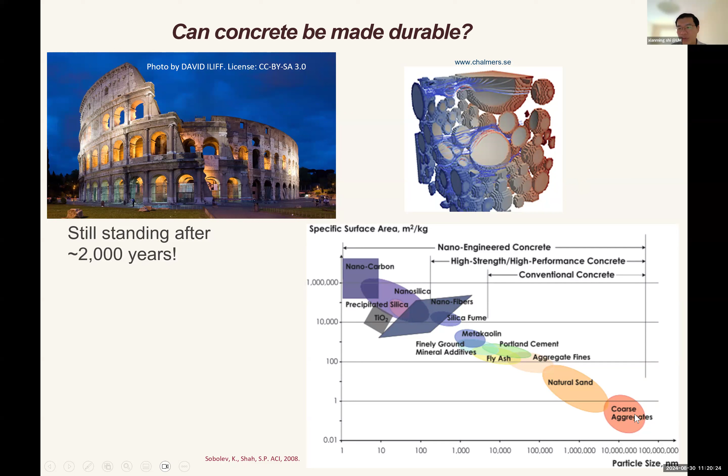One interesting thing is that in the last 3 or 4 decades especially, there's emerging technology such as nanotechnology. If we put concrete as a composite material under that sort of lens, we're talking about — if you look at this chart, on the x-axis is the particle size, the y-axis is the specific surface area. You can see that coarse aggregates are way over there towards the right and at the bottom, meaning it has high particle size but low specific surface area.

But if we look at the other end of the spectrum, say nanocarbon, for instance — today I'll talk quite a bit about graphene oxide, which is one type of nanocarbon — then we're talking about a size of between 1 to 5 nanometers, and a surface area of 1 million square meters per kilogram, which is really high. So with that kind of high specific area, the property or behavior of the material changes significantly.

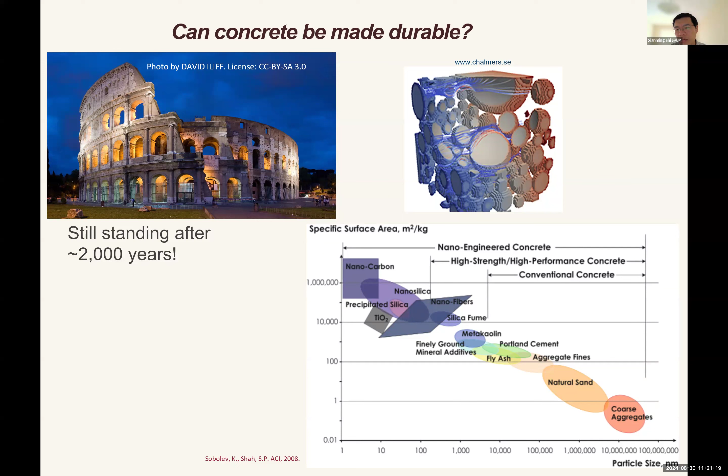So that's where the magic occurs, because this type of material tends to have really high surface activity, and therefore the interaction between the nanocarbon with cement particles and water will be dramatically different than how a coarse aggregate would interact with cement and water.

So today I'll try my best to share some of the recent studies, starting from a graphene oxide enabled fly ash based geopolymer, which is a patented technology we developed at Washington State University. Then, of course, I move on to some other graphene oxide enabled innovations. Just to give you two examples: one is how we can better use silica fume, yet another industrial byproduct — in this case, silica fume from the semiconductor industry, and fly ash from burning coal to produce electricity.

And then also another case was how we could upcycle waste masks, diverting them from the waste stream towards beneficial use in concrete. I'll also talk about some other nanotechnology-enabled innovations which may not be exactly graphene oxide — for instance, nanosilica, nanoclay, and things of that nature — and then conclude. This is a little photo we took in my previous lab where we were doing some work on carbon negative concrete.

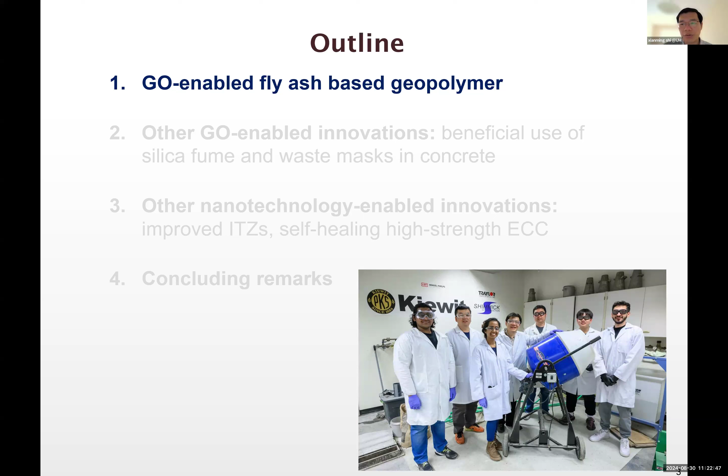Nanotechnology was also a key component to that technology, which is now patent pending, and we even launched a startup company, and the company already got some SBIR grants.

Starting with the first topic, graphene oxide enables clinker-free concrete based on coal fly ash. We made some pervious concrete cylinders in the lab. The two on the left were made with ordinary Portland cement, and the two on the right were made with coal ash without any cement clinker. The color is slightly different, but other than that, most behaviors are pretty much comparable in terms of mechanical properties and durability, as you will see later.

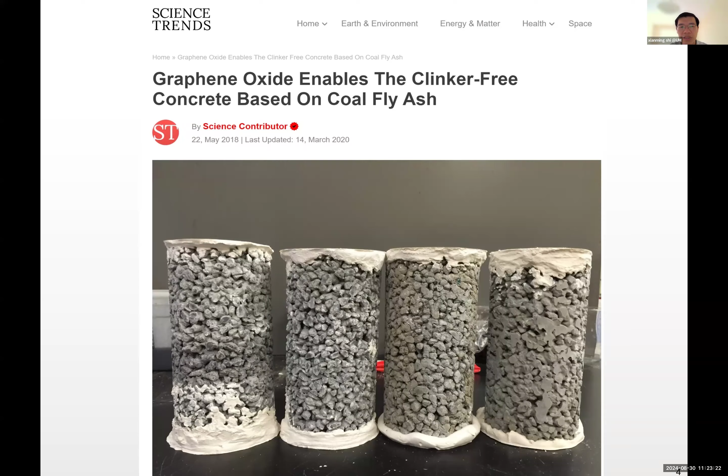Taking one step back, why do we do this? On the left-hand side, you can see that cement production is arguably responsible for, some say 5%, some say 8% of global CO2 emissions. But anyway, it's a large footprint.

On the right-hand side, you've got this underutilized industrial byproduct. From burning coal to produce electricity, we have a lot of ash, fly ash or bottom ash. You see this picture where if the fly ash is underutilized, there's a risk of air pollution. On the bottom right, there's also the risk of contamination of land resources during a heavy rainstorm or similar event.

On the bottom left, you see yet another place, basically a huge pond with unused fly ash. Oftentimes, if it's not done properly, this could be a contamination source for the groundwater.

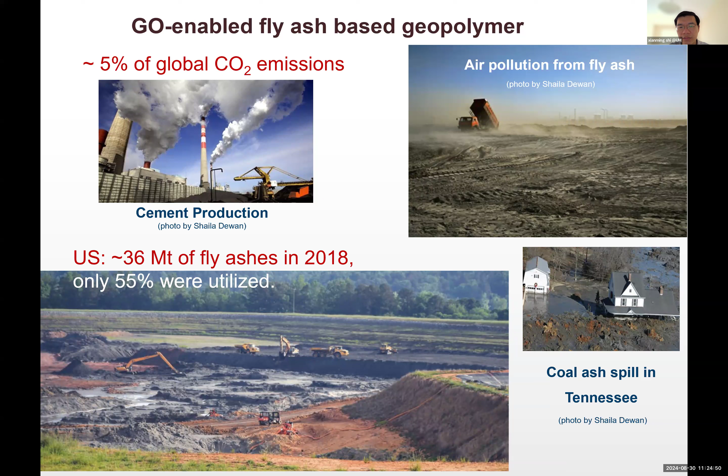As you can see, the numbers in the US show that annually we produce about 36 million tons of fly ash, and only about 55% is utilized. I believe the numbers are improving in terms of utilization rate because of R&D and the implementation of some novel solutions.

Graphene oxide is a carbon-based nanomaterial. I'm sure some of you have heard about graphene, which won the Nobel Prize about two decades ago. Graphene is made from graphite, usually through either a physical approach or a chemical approach.

The chemical approach we took is known as the modified Hummer's method. Basically, you use strong acids to exfoliate the nanoplatelets out of the graphite material. In the process, because of the strong oxidation, the nanoplatelet surface acquires functional groups such as hydroxyls and carboxyls, as revealed by the FTIR on the left and the XPS on the right.

These functional groups are very beneficial because they make the graphene oxide reactive. That's one difference between graphene oxide and carbon nanotubes. Graphene oxide actually has more functional groups—they're more reactive, more compatible with water and other polymer matrices.

We've done quite a bit of work putting a trace amount of graphene oxide in asphalt materials and coatings, but that's not part of the talk today. Today we focus on cementitious materials.

You can see that this graphene oxide is actually water soluble up to about 5 grams per liter, and all the way up to 10 grams per liter you can still make a very stable aqueous suspension. I call this dark ink.

With this dark ink, if you dry it under the microscope, you can see they're like crumbled papers. If you take a piece of paper, say 11 by 8.5, crumble it into a lot of wrinkles, and then shrink it by a million times, that's roughly the size of a graphene oxide nanoplatelet. Under the scanning electron microscope, you can very clearly see wrinkles.

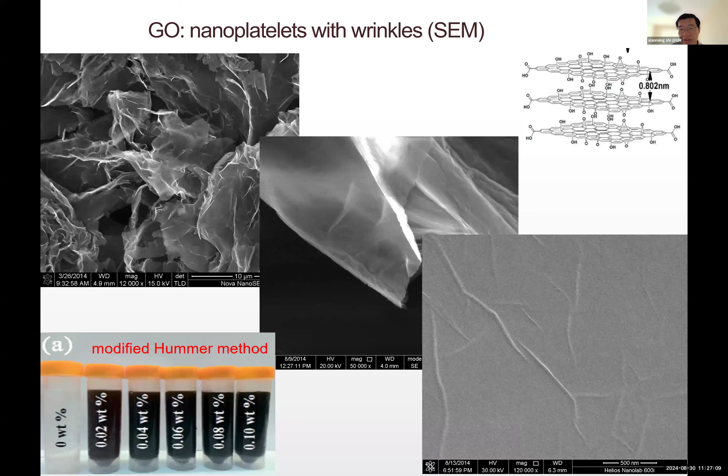These wrinkles actually give them certain types of properties that may be very desirable. Actually, wrinkles are good for us.

Certainly my group was not the very first to study how to use this kind of unconventional concrete admixture in concrete, but we were probably the first to reveal some of the mechanisms of how they actually work. This is a multifunctional role.

Multifunctional admixture: when graphene oxide is applied at 0.02% by weight of cement, for instance in this case—this paper focuses on the fundamentals, so it's not a real concrete system, it's a cement paste—you can see 0.02% increases the 28-day compressive strength of the paste by about 29%.

On the mechanism side, we reveal that graphene oxide is more than just a nanofiller. It improves the hydration degree of cement and the polymerization of these hydration products. Also, because they're negatively charged on the surface—imagine really strong mechanically, and even thermally... well, I take back the thermal part. The thermal part is, if we reduce the graphene oxide and remove some of the functional groups, then we can make it thermally and electrically conductive.

Graphene oxide itself is not thermally or electrically conductive, but the negatively charged platelets consume the calcium cations in the juice. Going back to the concrete being a solid sponge, when it's partially or fully water saturated, you've got this highly alkaline juice in the concrete pore solution, with calcium ions. Because of the interaction between the negatively charged nanoplatelets and the calcium cations, and some other negatively charged ions, you induce different kinds of hydration products, such as tobermorite-like hydrates or jennite-like hydrates.

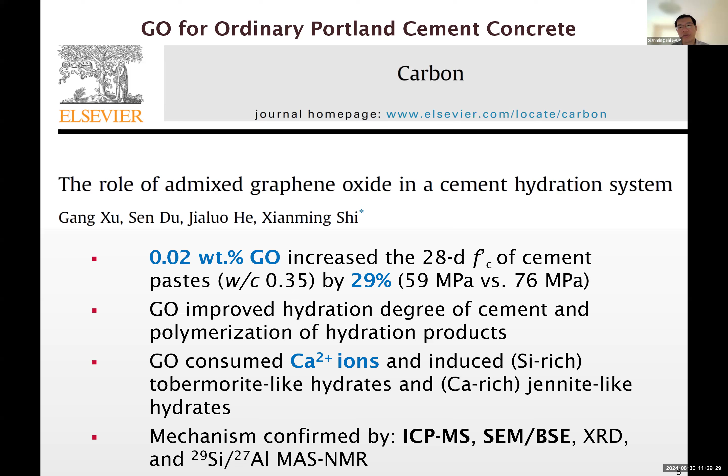These mechanisms were revealed using a lot of different tools. I won't go into details here, but graphene oxide is a magic multifunctional admixture for ordinary portland cement concrete systems. We can actually see the nanoplatelets under the microscope, we see the strength improvement, and also we see improvement in durability.

Earlier I mentioned the specific surface area, but look at this one. If we go by the same unit, square meter per kilogram, then we're talking about 2.6 million, which is even higher than that 1 million number we mentioned earlier on the graph.

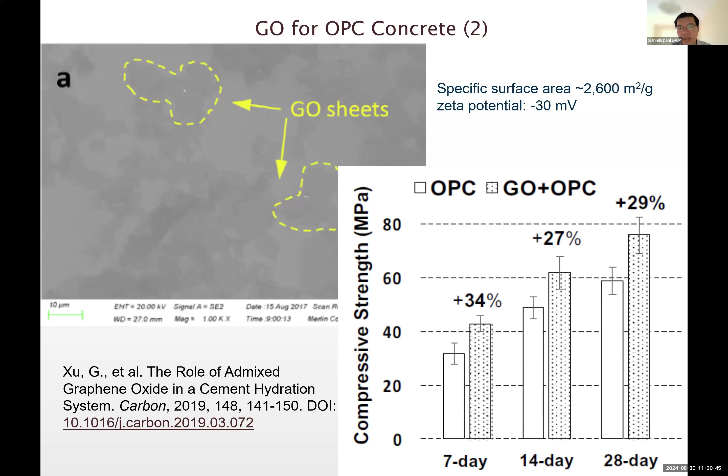The zeta potential is another parameter to watch out for, because not all the graphene oxides are made the same. The amount of negatively charged groups on the surface is measured typically by zeta potential at a neutral pH. In this case, this zeta potential of minus 30 millivolts indicates this is a somewhat stable system, and it's about one nanoplatelet instead of multiple. Because when you have more than 5 nanoplatelets sticking together, then that graphene oxide is not very useful. It's more like a micromaterial than a nanomaterial, partially because it loses its magic once you have more than 5 nanoplatelets sticking together.

So the question then becomes, can we manufacture a concrete without any cement? We were playing with this Class C ash, which is fly ash. Typically the classifications include Class C, Class F, and Class N. Class N stands for those naturally occurring. For the industrial byproducts, Class C tends to have higher calcium oxide content, and Class F is those with higher silicon oxide content.

This Class C ash, without any activator, when we mix it with water at a water-to-ash ratio of 0.3, you actually get some strength - that's the figure on the left. You see that these fly ash particles have a unique spherical shape, so you can easily identify them under the microscope. This is a really fine scale - if you look at this chart, it's probably 25 by 25 microns, which is much finer than your hair.

What's fascinating is that your human hair's typical diameter is 80 microns, which is 80,000 nanometers. The phenomenon occurring at this scale, 25 by 25 micron scale, actually affects the engineering performance of the material. On the right-hand side, without activators, the 28-day compressive strength is about 20.5 megapascal. But when we add water glass as one of the activators - I think in this case we also added calcium chloride - then you see further dissolution of these spheres under the microscope, shown in the figure on the right.

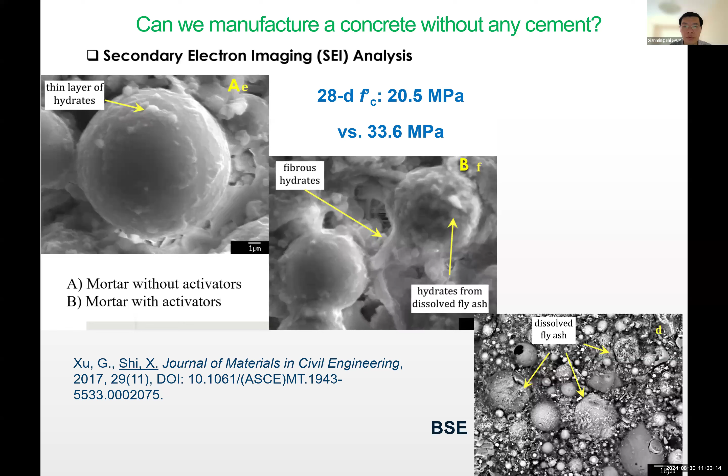With a little bit of activation, we can get to about 34 megapascal, which is roughly 5,000 psi, but we want to go further. By adding 0.02% graphene oxide by weight of ash, we can increase that by roughly another 25%. You can see these improvements from the trace amount of graphene oxide in this activated fly ash paste, at 7-day, 14-day, and 28-day marks. So now we're reaching approximately 6,000 psi at 28 days.

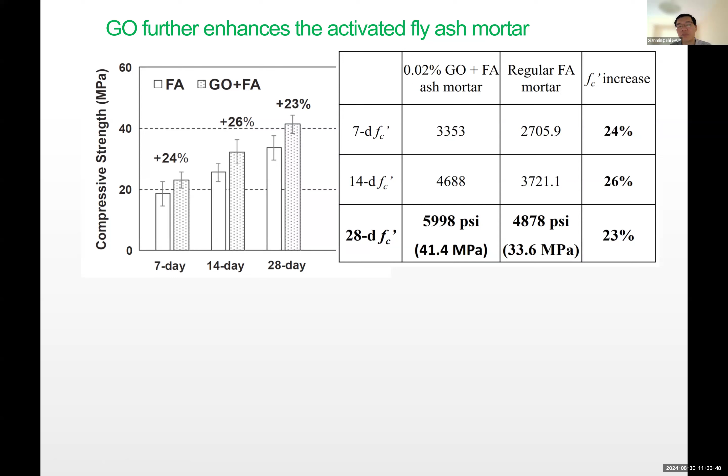Actually, even for nuclear waste, right? We know nuclear waste is typically contained using concrete, but now this type of 2D nanomaterial will further enhance the ability of concrete to encapsulate and contain the pollutants, keeping them from leaching out at a faster rate.

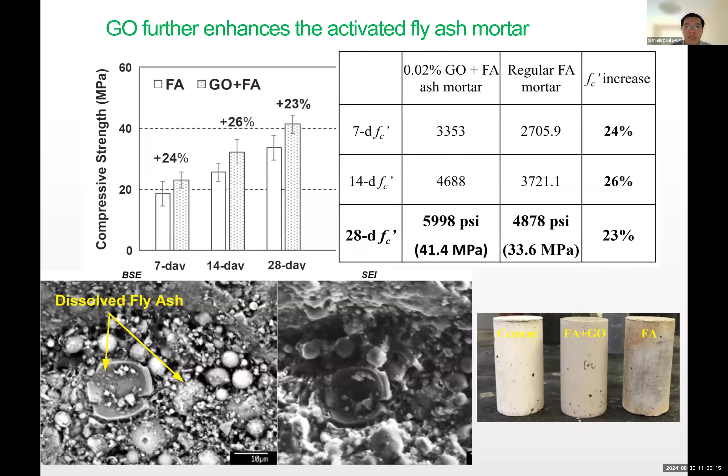So going back to fundamentals, what happened there is these are silicon nuclear magnetic resonance, or NMR, spectra at 56 days. If you look at the one on the left, that's the geopolymer, in other words activated fly ash without adding any graphene oxide. But once you add graphene oxide, even at 0.02%, the hydration products change significantly.

Of course, this is a very busy chart. What I'm trying to show is that the silicon, or silicate, in the hydration product takes many forms, from Q0 all the way to Q4.

Typically for ordinary Portland cement concrete, the silicate exists in the form of Q1, Q2, and Q0. Q0 basically is unhydrated cement clinkers. And Q1, Q2 means there's one or two neighbors who happen to also be silicate or silicon atoms.

But once they have more network structure, more neighbors being silicon or silicate, then you're moving into the domain of Q3, Q4. I would argue that when you have more than 50% Q3, Q4, then it's truly a polymer or geopolymer, instead of a linear polymer, which is a CSH gel, or calcium silicate hydrate.

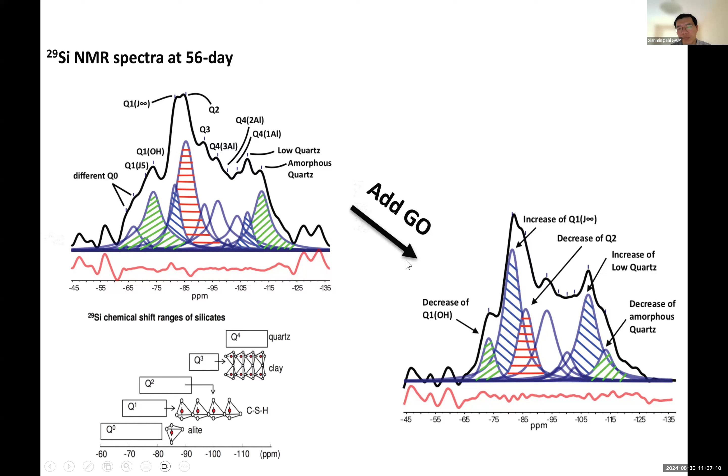But this is a very busy chart—the main storyline is that with a trace amount of graphene oxide, you actually change the hydration products and make them quite different. The numerical numbers are here: the total peak area under Q3, Q4 is increased from 47% to almost 55%.

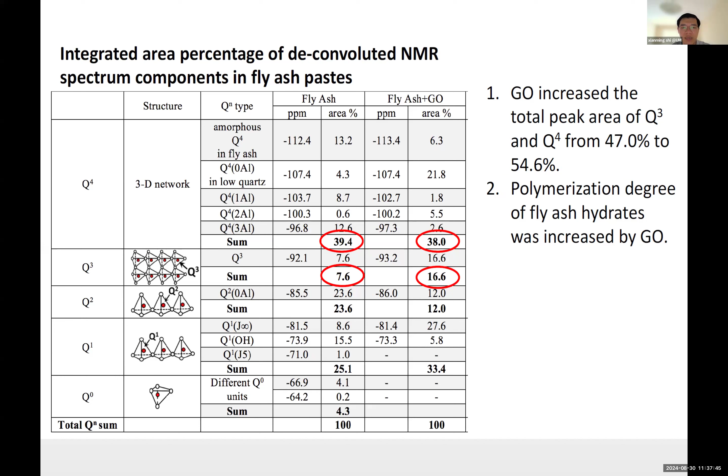So in other words, this indicates an increase in the polymerization degree. And this kind of network structure, or higher degree of polymerization of the inorganic material, translates to better resistance to chemical attack, such as resistance to deicers, sulfate attack, or acid attack.

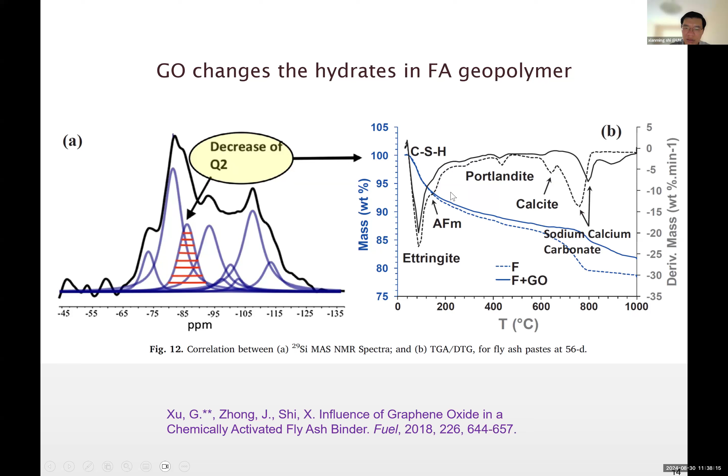So now we could actually use different tools to shed light on different pieces of the puzzle and reveal the whole picture. For instance, on the left-hand side is the NMR results showing the graphene oxide reduces the Q2 type of silicate. On the right-hand side, this is a TGA, or differential TG. And basically they corroborate and tell the same story.

Now there's another tool we use, which is EPMA, or electron probe microanalyzer. For instance, here you take a small cross-section of the concrete, or in this case mortar, and select an area, let's say 100 by 100 microns. Then you scan it once and get at least 5 or 6 different elements. Here we'll only show 2, which is calcium and silicate, but we'd also be interested in sulfate, aluminum, iron, and so on.

So this is a color map. The red color indicates a higher concentration. These are actually digitized—a 100 by 100 micron area would give you 500 pixels times 500 pixels, so it's tens of thousands of data points.

So you can do color mapping of the elements, which is very visual, or you can do the elemental ratio by dividing calcium to silica, and then create another sort of map. Again, visually, you can see some difference between the top one, without graphene oxide, and the bottom one, with graphene oxide. But there are other ways.

For instance, quantitatively, since we have tens of thousands of data points, you can calculate the aluminum-to-calcium ratio as the y-axis, silica-to-calcium ratio as the x-axis. Then you start seeing some patterns.

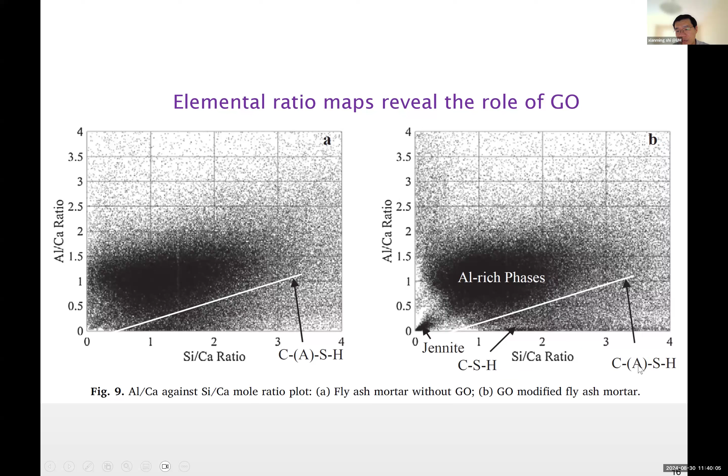For instance, the one on the left, without graphene oxide, versus the one on the right, with graphene oxide—you see this jennite-like material showing up in this corner. And again, in the case of fly ash-based geopolymer, it's not just CSH gel, it's actually more like CASH gel, where A stands for aluminate. So again, we have different tools to shed light on the same story.

Again, NMR, EPMA, and this EPMA can also scan through. EPMA has different modes—like under the BSE, or backscatter electron mode, you can get this image, and that seems to indicate a jennite particle.

And then you do the 1D line scan on the surface, and you can see the richness of the carbon. Carbon's here, compared with the adjacent area, the carbon's a little higher. That means you've got some graphene oxide here, most likely. And then you see some other elements, so all the different data points eventually converge and tell the same story.

Now you've got more graphene oxide induced jennite phase. Similarly, we also found low quartz, which is a Q4 type of hydration product. And again, different tools shedding light on the same story.

So in summary, what is the function of the graphene oxide? Again, these are carbon-based nanomaterials like platelets, but on the surface with a lot of functional groups like carboxyls, hydroxyls, and so on. So with the negative charge, they exclude the intermediates.

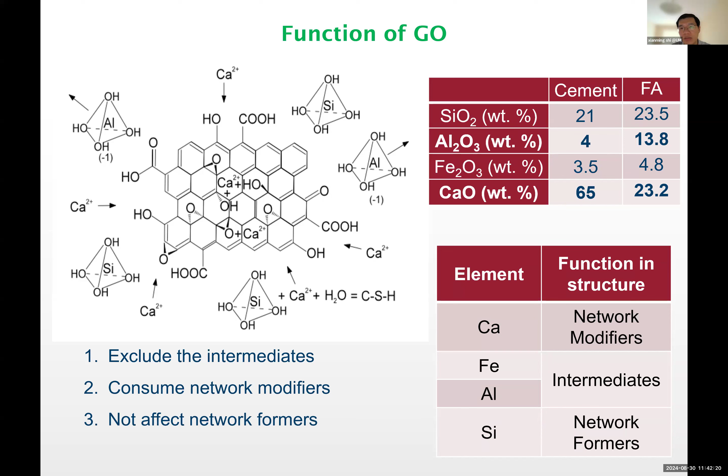That's the basis of our original motivation of activating the ash to generate a cement, I would say a clinker-free green cement. So the main story here is we're trying to divert an underutilized industrial byproduct of waste towards beneficial use, to partially, or actually fully, replace cement in concrete.

So the first thing is the ash is an inorganic polymer, so you have to dissolve it. We use activators such as waterglass and calcium chloride to help dissolve it. Now, once it's dissolved and reacts with water, you form the new gel.

Because of the presence of these nanoplatelets, they're like coaches. Originally, without graphene oxide, it's like a soccer field with random players. Now with coaches, they're more organized, reorganized into teams, and the final product has a much higher degree of polymerization and more regulated microstructure.

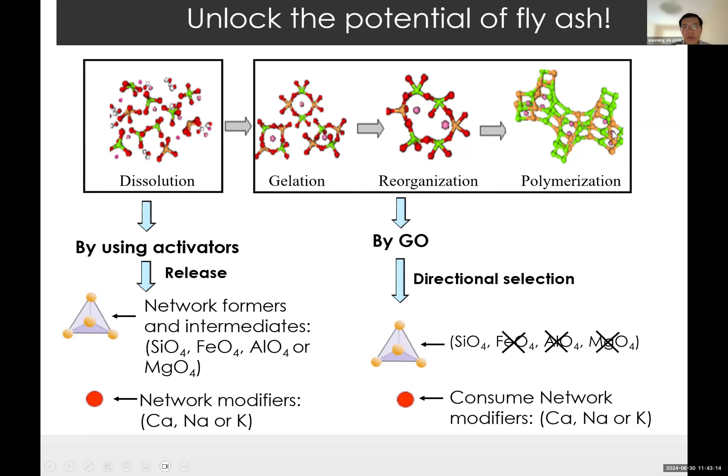So now that's basically the patent itself: to develop a clinker-free cementitious binder from ash particles, an industrial byproduct.

Now, of course, you may ask a question about cost, right? With nanotechnology there's always a concern. Cost-wise, 10 years ago it was ridiculous — graphene oxide was sold at $100 per gram. But not to my surprise, things change, and because of economy of scale, now you can get really high quality graphene oxide for $175 per pound. So when you do the life cycle cost analysis, you'll find this is actually pretty cost effective.

So with this greener cement, I would call it a geopolymer, we try to put it to use. The first field demonstration we did was a pervious concrete. Pervious concrete, for some of you who already know, is a very good tool for low impact development because of many environmental benefits, such as the ability to allow rainwater to infiltrate through.

So you recharge the groundwater in areas which are arid — well, not in Miami, right? In Miami, we have probably too high a water table, so we need some changes to that design. But in many other areas, recharging groundwater is pretty important, purifying the stormwater, reducing traffic noise, reducing heat island effect, and also even reducing slip-fall risk in cold regions when you have black ice or light snow. So there's a lot of greenness in this pervious concrete pavement compared with traditional impervious pavements.

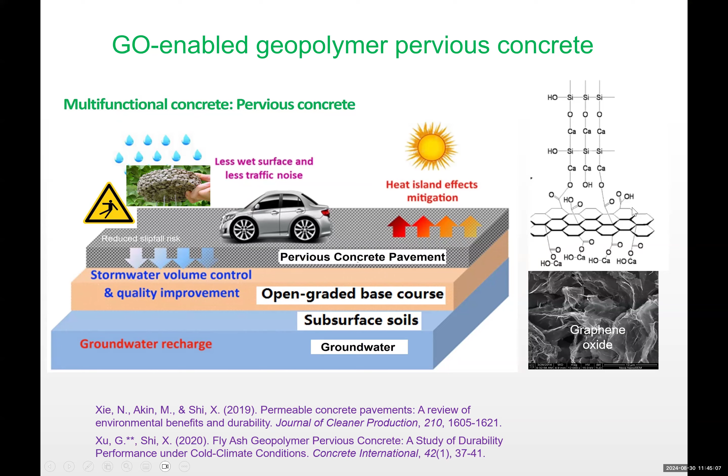One thing that's not very green is we still use cement, right? So that's where we're trying to replace the cement. Here we developed 4 types of mix designs of pervious concrete: one uses cement, one uses cement with graphene oxide, one uses activated ash, and one uses ash plus graphene oxide.

Typically, the design is different than in pervious concrete by reducing or eliminating the use of fine aggregate, so you get the built-in ability to infiltrate rainwater.

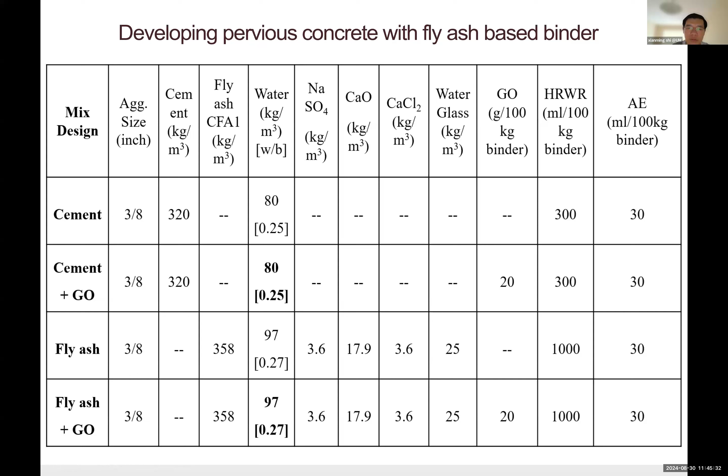So the gist of the story is that, if you look at the density, the ash ones are somewhat denser versus the cement-based ones, but they're still pretty reasonable. Their void ratio is in the range of what we would define as pervious concrete, and in terms of compactability or workability, they're very similar.

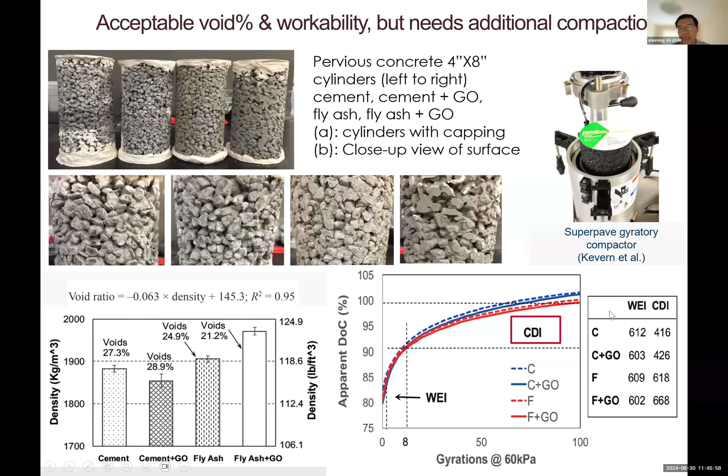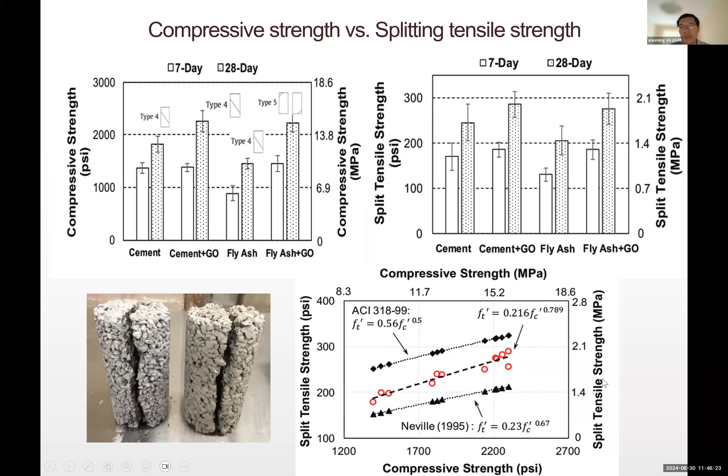When we look at strength, especially with the graphene oxide group, it's basically comparable to the group with graphene oxide modified cement pervious concrete, even though the color is a little different. They fall into this empirical range in terms of relationship between split tensile strength and compressive strength, so they're basically reasonable rivals.

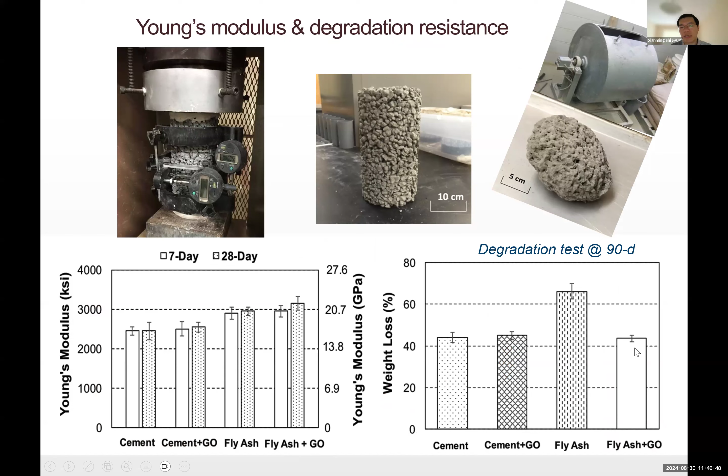When you look at Young's modulus and degradation or abrasion resistance, the fly ash-based pervious concrete actually has a somewhat higher Young's modulus, but when you look at resistance to abrasion, they're pretty good, especially with the one modified by graphene oxide. So these are very promising results.

We also did durability testing, because it's not always just about mechanical or physical properties, but durability in the long run. Here we look at the application scenario in cold regions. Of course, this ASTM C666 experiment is unrealistically harsh on the concrete, especially for pervious concrete, where in a real environment it's highly unlikely you'd have pervious concrete sitting in a pool of de-iced water, because it would infiltrate down into the base and subbase. But since we didn't have another method, we took this approach, even though it's pretty unrealistic and harsh.

But the main storyline is that with the modification of graphene oxide, the fly ash geopolymer did comparably well as the cement-based ones. Now what about de-icing? Sorry, that one was freeze-thaw only, so no de-icing involved. But it's still very harsh because they were sitting in water and the freezing rate is very rapid, which almost never happens in the real field environment.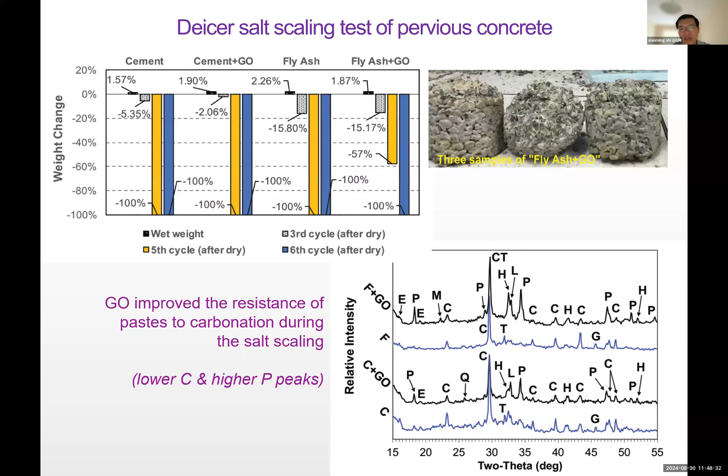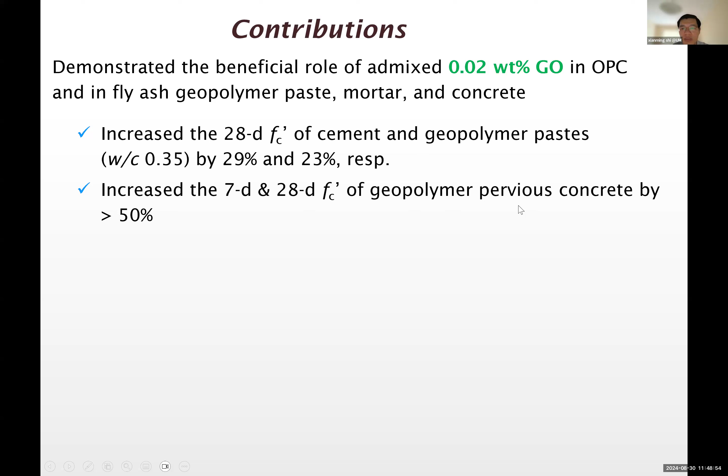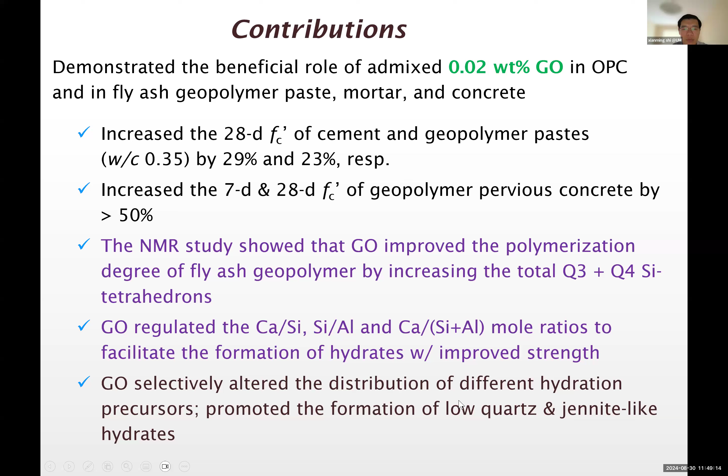So for this specific work, our contributions are as follows. We demonstrated the beneficial use of mixing 0.02% graphene oxide in OPC and in fly ash geopolymer paste, mortar, and concrete. They increased the compressive strength significantly, and more impressively increased the 7-day and 28-day compressive strength of geopolymer pervious concrete by more than 50%. NMR shows that they improve the polymerization degree, and they also regulate the type of hydration products that form, especially favoring those with better strength. There are more mechanisms revealed.

So moving on to some other graphene oxide enabled innovations - there are three of them, but I probably only have time to talk about two. The first one is utilization of silica fume. It's nothing new.

Silica fume has been a very popular supplementary cementitious material, just like blast furnace slag or fly ash. But silica fume is a byproduct from the semiconductor industry, and we found a way to better use it by treating it first with graphene oxide - again, the dark ink I was talking about.

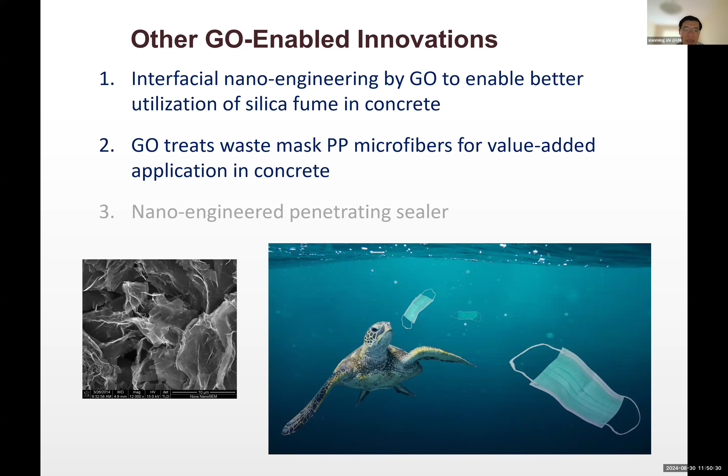Second example: during the pandemic, it inspired us to find a way to beneficially use single-use masks. We were able to treat these mask-derived microfibers with this dark ink and got some really interesting results. Now we're extending this line of research towards recycling or upcycling waste clothes. The third one, which I won't have time to talk about, is a penetrating sealer for concrete protection, which also involved the combined use of graphene oxide and nanoclay.

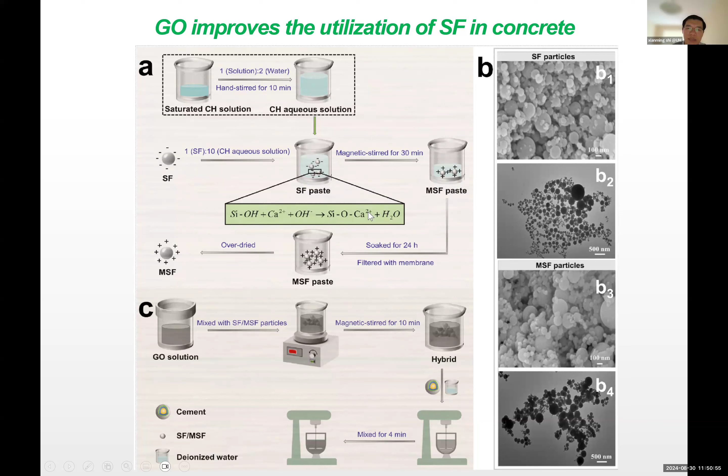Starting from the first example, silica fume - the challenge we ran into was that the silica fume surface is negatively charged, so we cannot easily use graphene oxide, which is also negatively charged, to treat its surface. How we make that happen is we first treat it with alkali, a calcium hydroxide solution, so that we make the surface positively charged, and then we treat it with the dark ink.

The main results are pretty fascinating, because the use of graphene oxide is only 0.04%, but the modified silica fume is about 5%. In this case, you improve the 3-day and 28-day compressive strength by 56% and 29% respectively, compared with 5% silica fume without the graphene oxide treatment.

So it's a significant improvement, but what's even more interesting is this approach reduced the water absorption by about 33%. Water absorption is basically an indicator of how fast water gets into the concrete - again, we're talking about a solid sponge here.

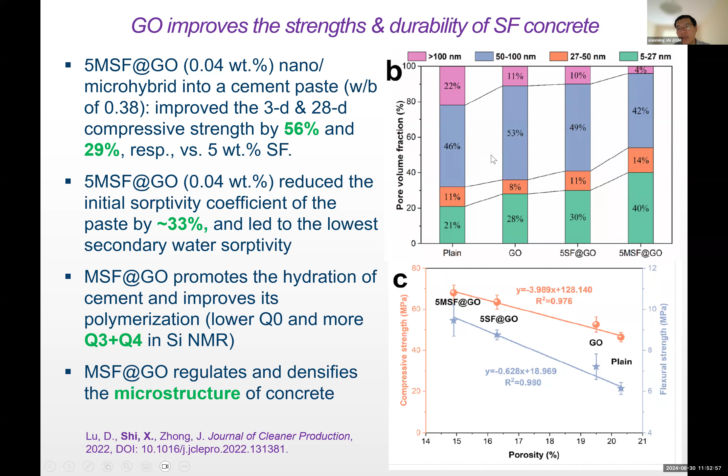Moving on to another example: medical masks. This was a tiny amount of work, just one single paper, but it got a lot of attention—reportedly reaching about 50 million viewers across dozens of countries and languages.

The idea is simple. Once you remove the cotton and the metal, you're left with the polypropylene mask. You cut it, use a home-style blender, and with the help of liquid, break it into fine microfibers roughly the size of a hair—typically 20 to 40 microns in diameter.

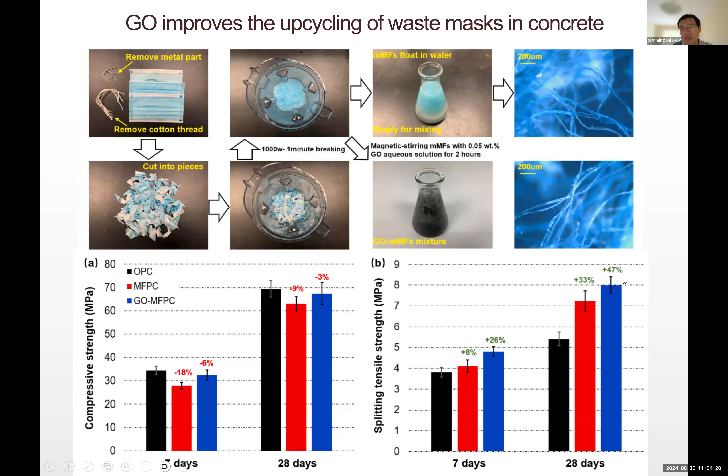When you put that into concrete as a fiber admixture, the compressive strength reduces a little since these are polymer fibers, but it's not too much of a concern—you lose about 3% compressive strength with this dark-ink treated fiber, but gain 47% split tensile strength, which is impressive especially since this material is very cheap.

We also looked at freeze-thaw durability. The dosage was 0.02% graphene oxide by weight of cement, and the polypropylene microfiber recycled from masks was only 0.1% by volume of the concrete.

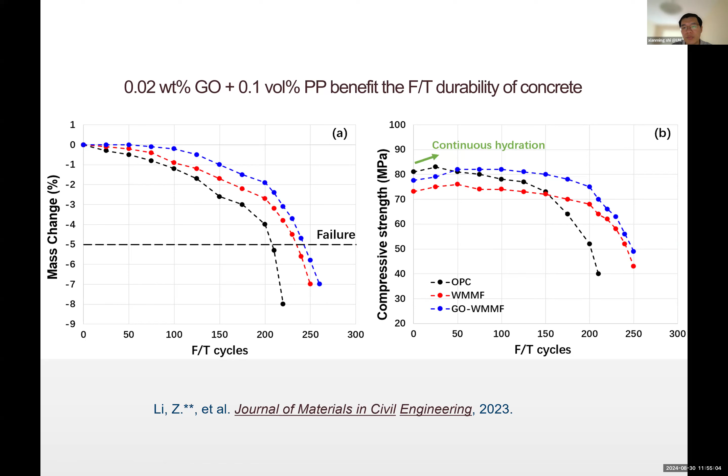We translate that into stochastic modeling. The blue curve shows significantly more freeze-thaw cycles endured compared with ordinary Portland cement, or compared with just the mask fiber without the dark-ink treatment.

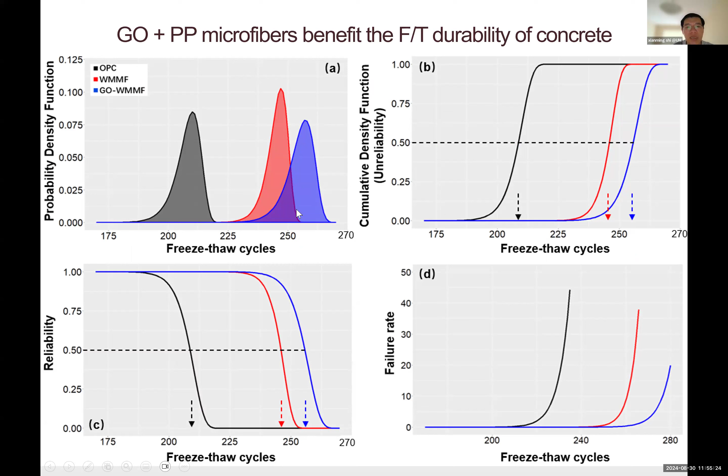To summarize, numerous used masks are littered or landfilled without treatment or proper disposal, often ending up in the environment and posing a risk to aquatic species. We demonstrate one beneficial use of such medical masks, illustrating great potential to upcycle them in concrete and help incentivize their collection.

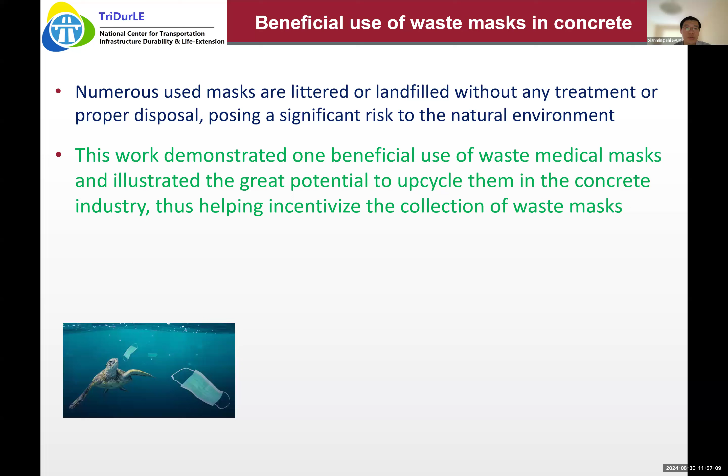Of course, I'm not in the business of doing this myself, but I know there's a small company in Canada already collecting medical masks and diverting them from the waste stream toward beneficial use—almost concurrent with our work. I'm not sure if they've read our paper yet. There are a few papers published, but we're extending this line of research toward beneficial use of waste closures.

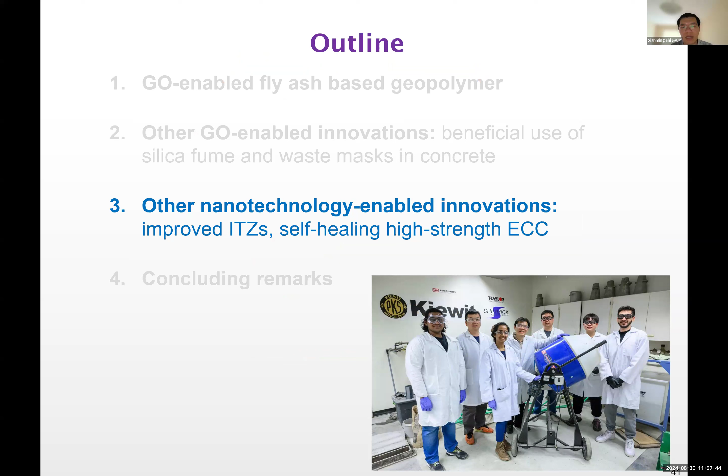The last part is other nanotechnology-enabled innovations. I'll talk about two examples—there are many, but I'll focus on just these two.

The first is using graphene oxide to engineer the interfacial transition zone on the fine aggregate, and more recently even on the coarse aggregate. You treat the sand or rock with that docking, then put it into concrete, and it works like magic—that's another pattern we found.

The second is high-strength ECC, or engineered cementitious composite, also known as bendable concrete. Here we incorporate nanosilica to enable better self-healing behavior by keeping cracks really fine—typically less than 30 microns in width. And of course, other nanotechnologies like carbon-negative concrete, which we've started exploring as well.

One of the secret ingredients is deposition of nanocarbonates on the surface of biochar. We were able to push the envelope dramatically. Prior to our work, people usually use 1 to 3% biochar by weight of cement in concrete, and we were able to push it all the way to 30%.

Now we're talking about engineered biochar being a new generation of coal ash or supplementary cementitious material. Based on the life cycle assessment, we can say, especially with carbon negative concrete, the infrastructure could serve as part of the climate solution. I won't have time to get into details, plus there are some IP issues, so I won't be able to share too much.

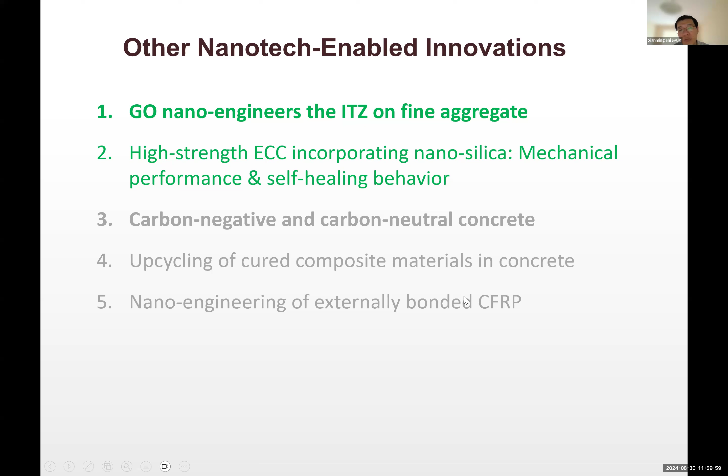Another one we did was externally bonded CFRP fabric to retrofit concrete. Our focus was to nano-engineer the resin to make it more durable.

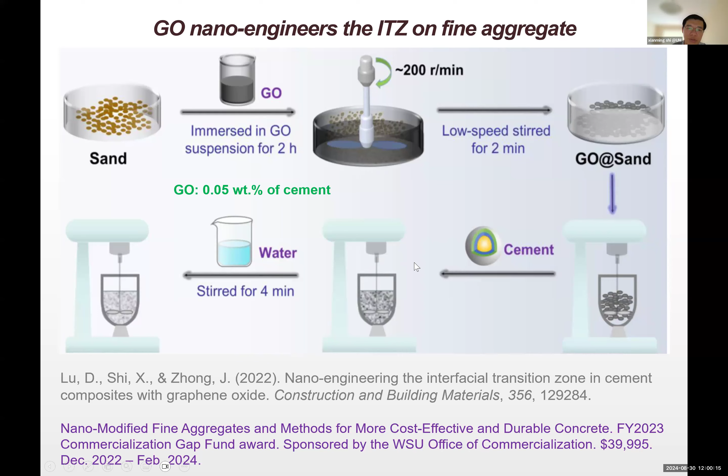Start from this - actually this is one of the patents in review. We can treat the sand with dark ink and then dry it, put it into concrete. You can see the results here on top: compressive strength and flexural strength both improve. Especially impressive is that if you just mix the graphene oxide directly into fresh concrete, you get 20% or 11% improvement in those compressive and flexural strengths, but if you actually use this new method, you get significantly better results.

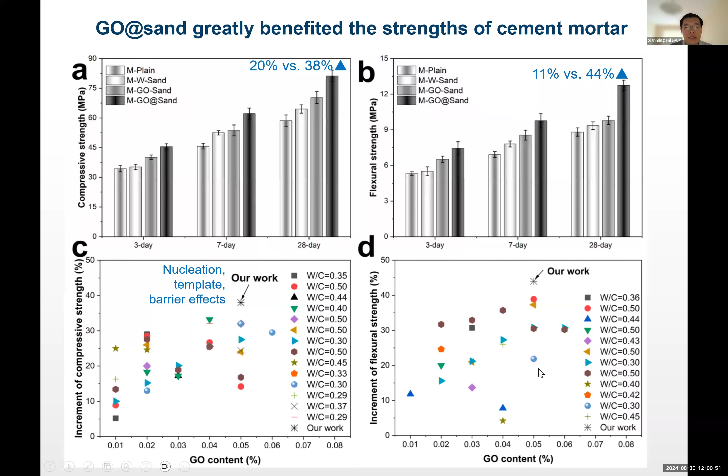So you can see our work standing out compared to many other studies out there, in terms of better improvement in strength and slightly lower usage of graphene oxide. So again, graphene oxide serves many different roles.

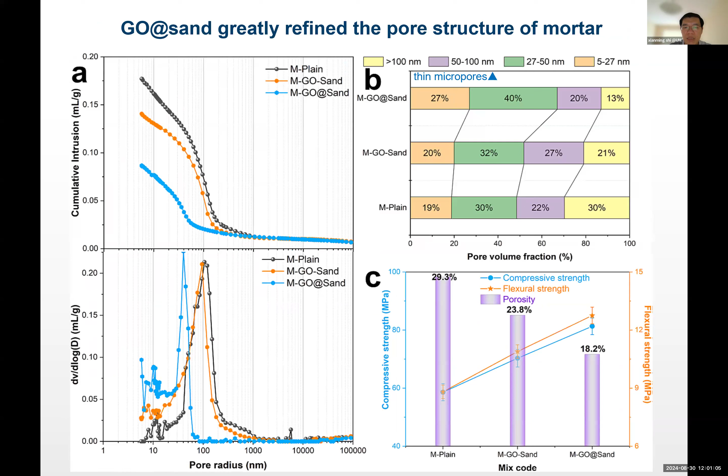We use mercury intrusion porosimetry to understand what happened. Basically we're seeing more finer pores, and you see improvement in strength and reduction in porosity. Also under scanning electron microscope, we can see that the interfacial transition zone on the surface of the sand is actually densified and becomes narrower.

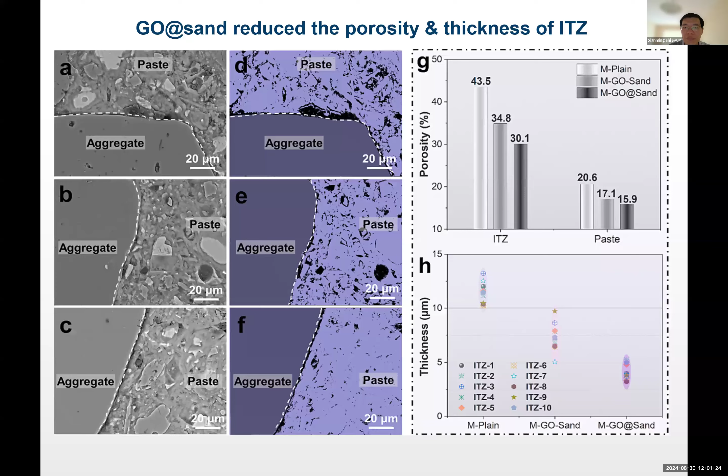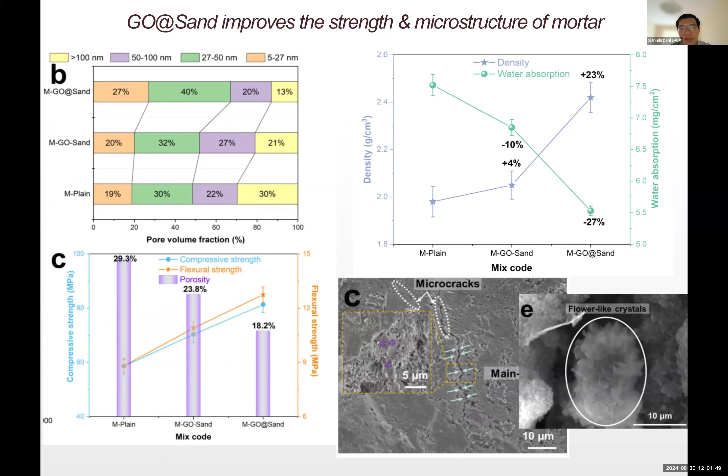Now yet another example is the high strength engineered cementitious composite incorporating nanosilica. We use a high strength PE fiber, 2% by volume, and then you can get a compressive strength of more than 80 megapascal at 28 days. You typically get between 4 to 6% tensile strain, so it's a strain hardening composite material, especially the reference M2 which uses more fly ash than cement.

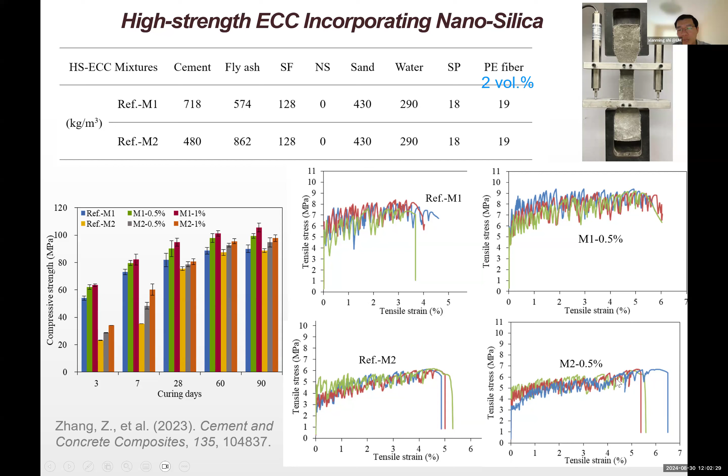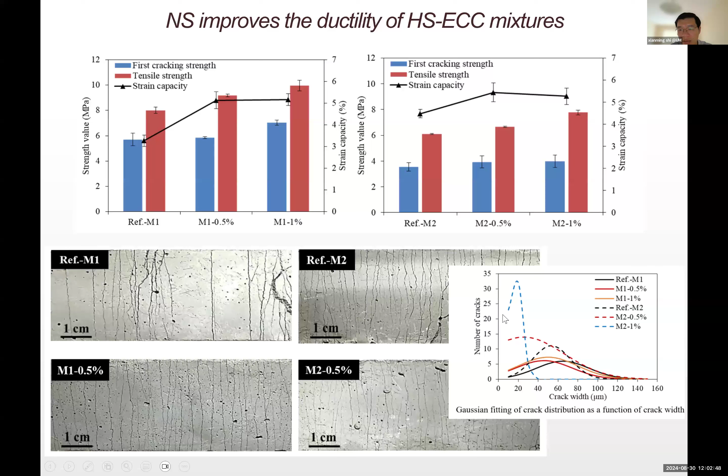So you can consider it as a high volume fly ash concrete with 0.5% nanosilica. The behavior is further improved - improving the first cracking strength, tensile strength, strain capacity, everything. You get more cracks, but finer cracks. If you look at the dashed blue line, this is the better behavior because most of the cracks are finer than 30 microns in width.

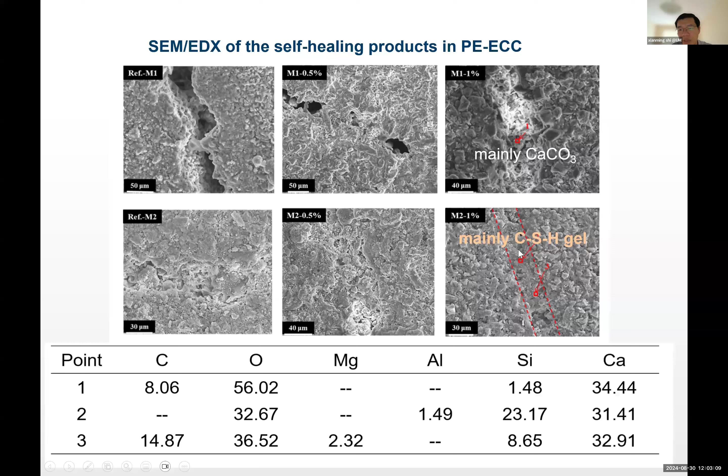That makes it easier to heal itself when it goes through wet-dry cycling, and that's proven. We can also see the healing product is different - when you have wider cracks, it's mostly calcium carbonate, but when you have finer cracks, your healing product is mainly CSH gel. So to conclude, nanotechnology holds great potential in transforming concrete as a composite material.

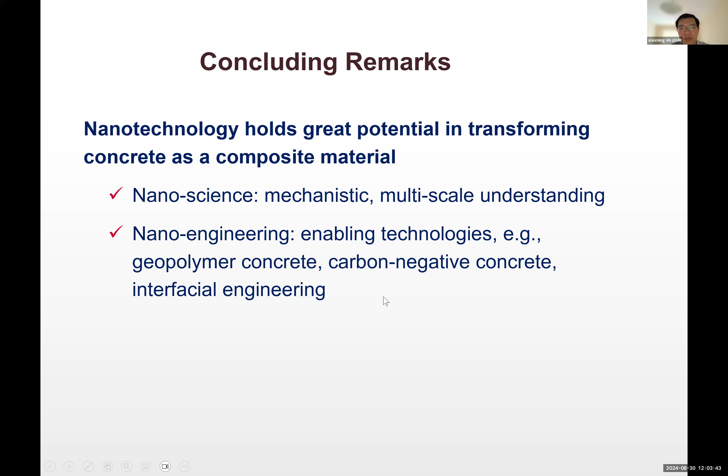I would consider there are two thrusts. One is nanoscience, truly understanding what's going on at that fine scale, achieving mechanistic multi-scale understanding. The other is, armed with such fundamental knowledge, you can do nanoengineering. For instance, I talked about how nano modification enables better geopolymer concrete, carbon-negative concrete, and most of it has something to do with interfacial engineering.

With that, I welcome your questions.

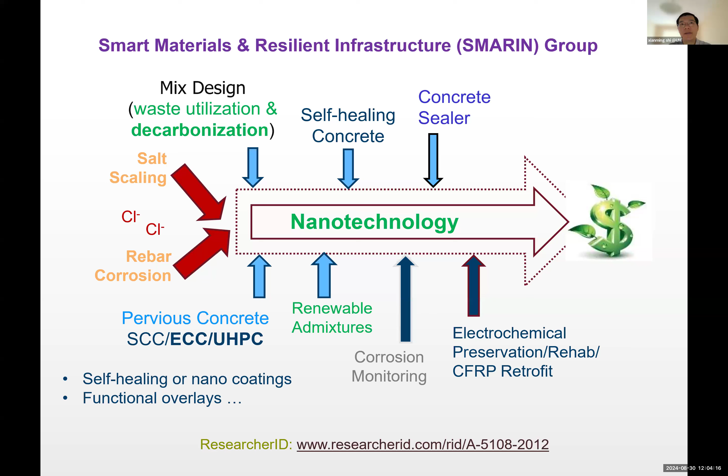Let's see, we do. Oops, somebody said they cannot see my screen. Was that the case? No, I didn't receive it. I didn't have an issue, and I don't think that was okay. But anyway, I can share the slides afterwards as a PDF. No problem with that. But any...